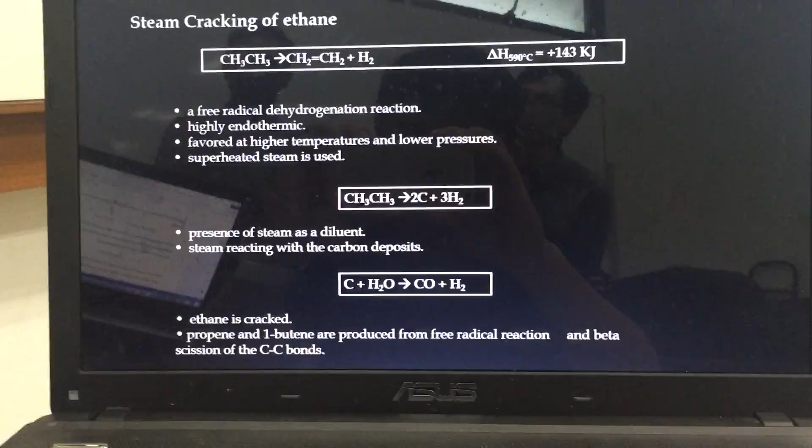First, cracking ethane can be visualized as a free radical dehydrogenation reaction where hydrogen is a co-product. The reaction is highly endothermic, so it is favored at higher temperature and lower pressures.

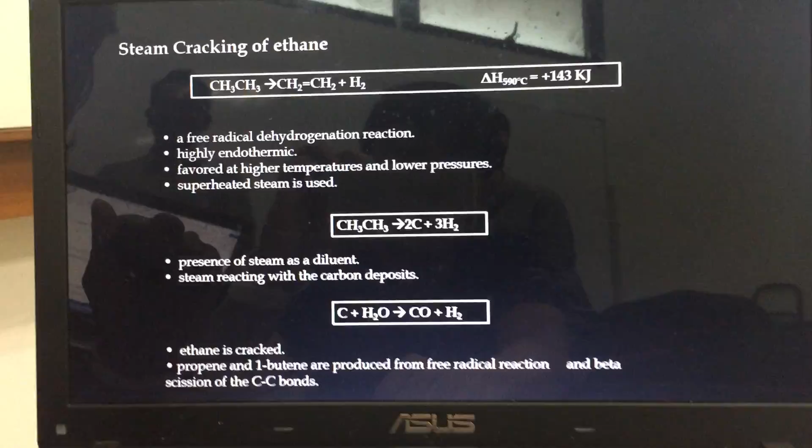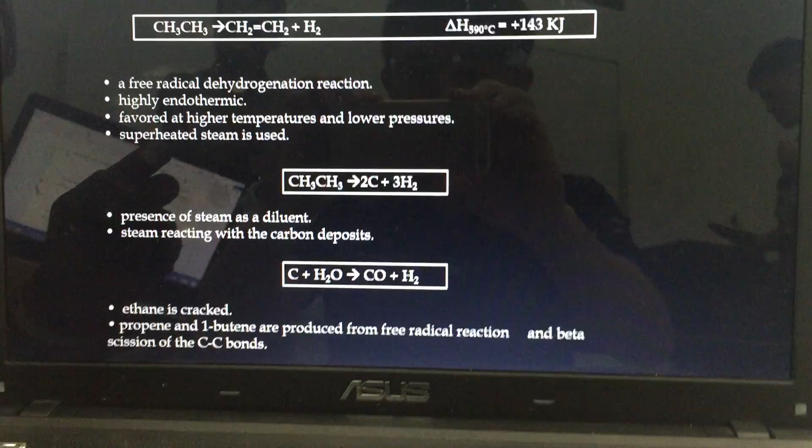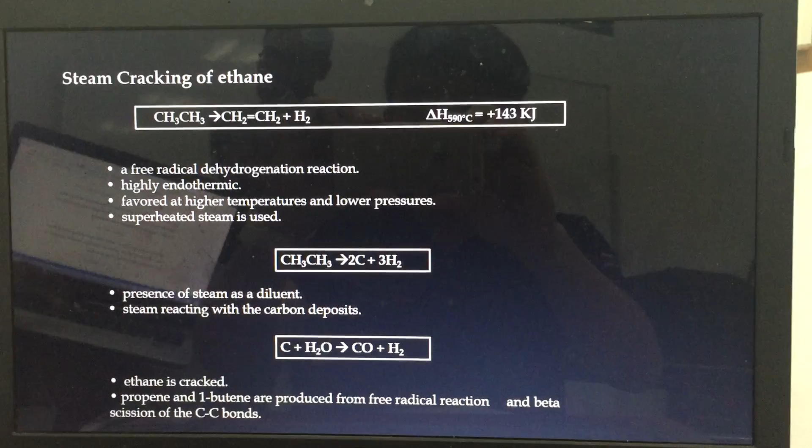Superheated steam is used to reduce the partial pressure of ethane and reduce carbon deposits formed by the pyrolysis of hydrocarbon at high temperatures. Additionally, the presence of steam as a diluent reduces the hydrocarbon's chances of being in contact with the reactor tube wall. Deposits reduce heat transfer through the reactor tubes, but steam reduces this effect by reacting with the carbon deposits.

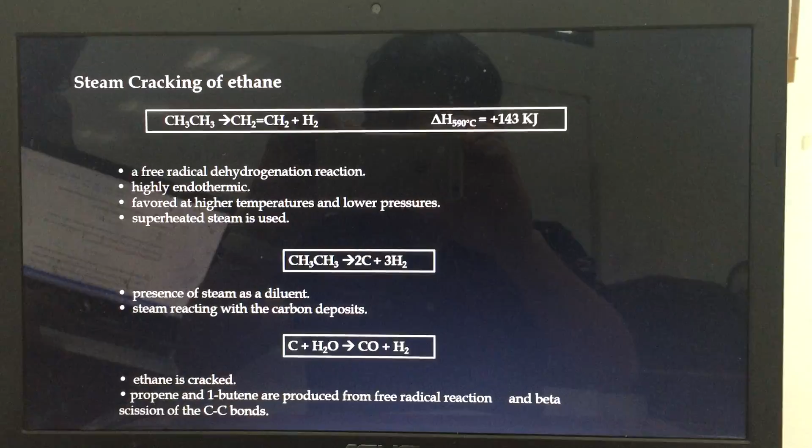Many side reactions occur when ethane is cracked, where propene and 1-butene are produced from free radical reaction and beta scission of the carbon-carbon bonds.

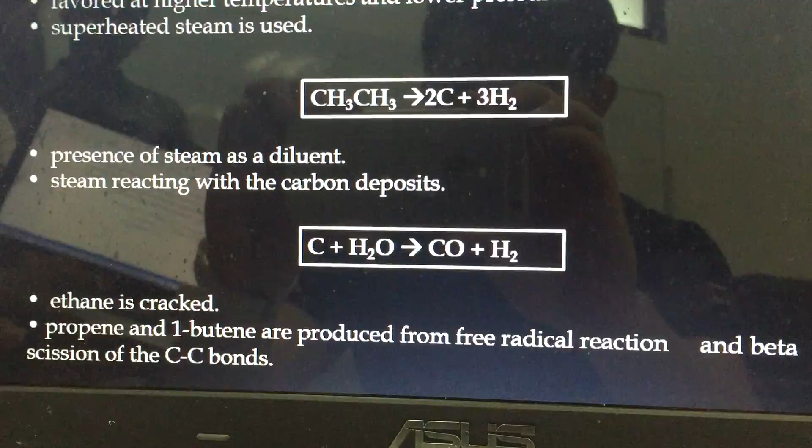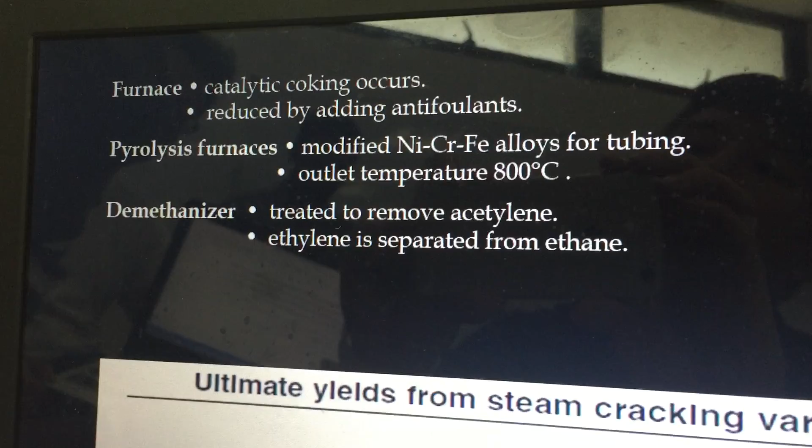The newly formed free radical may be terminated by abstraction of a hydrogen atom, or it may continue cracking to give ethylene and a free radical. The produced free radicals further crack to yield more olefins.

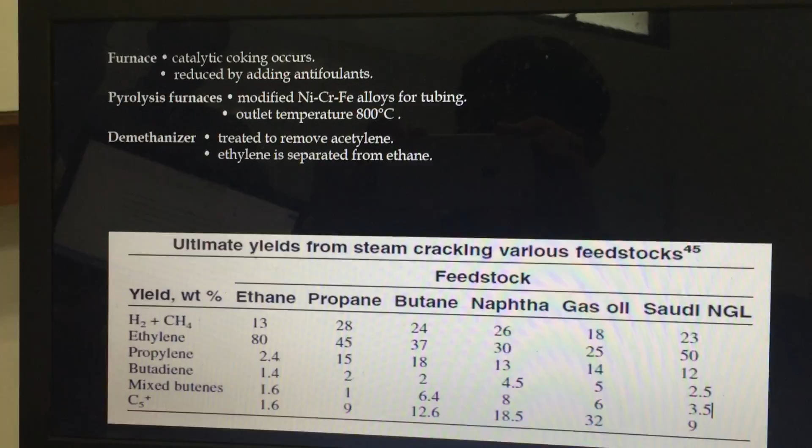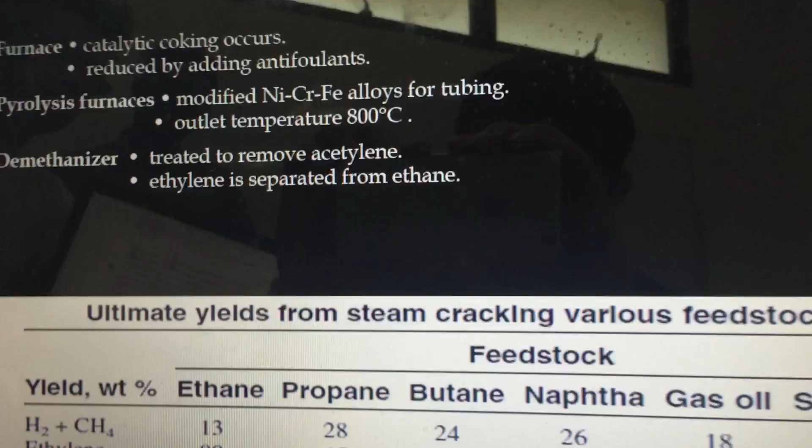In the furnace and in the transfer line exchanger, catalytic coking occurs on clean metal surfaces where nickel and other transition metals used in radiant tube alloys catalyze dehydrogenation and coke are formed.

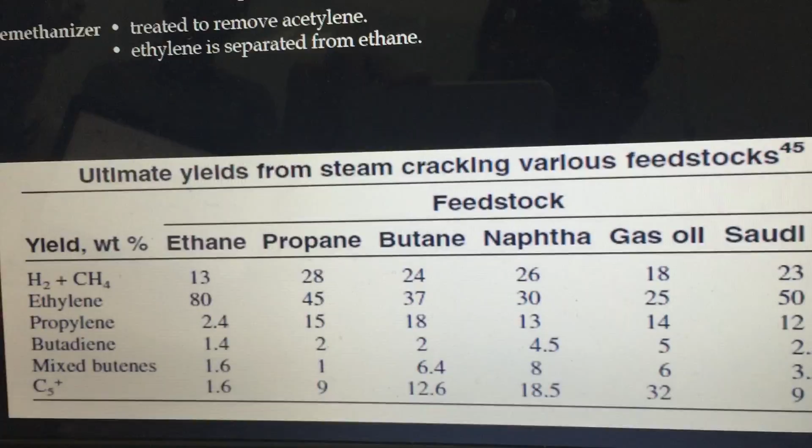The radiant tubes gradually become coated with an internal layer of coke, thus raising the tube metal temperature and increasing pressure drop through the radiant coils. Coke formation reduces product yields, increases energy consumption and shortens coil service life.

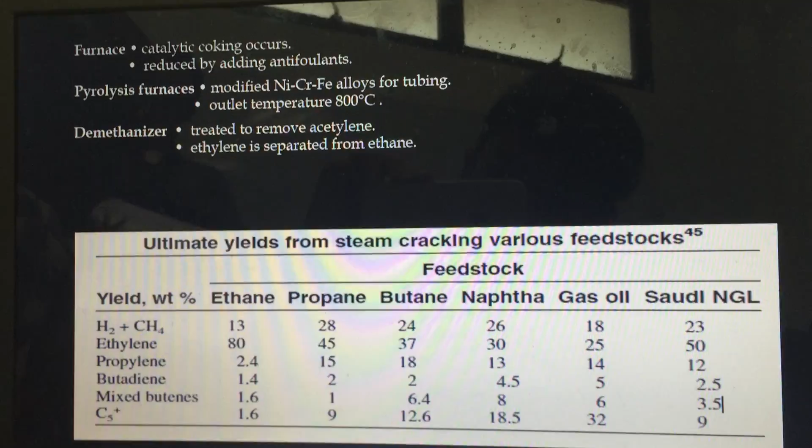Coking is related to feedstock temperature and steam dilution. When coke reaches an allowable limit as indicated by a high pressure drop, it should be removed. Coke should be reduced by adding antifoulants which passivate the catalytic coking mechanism.

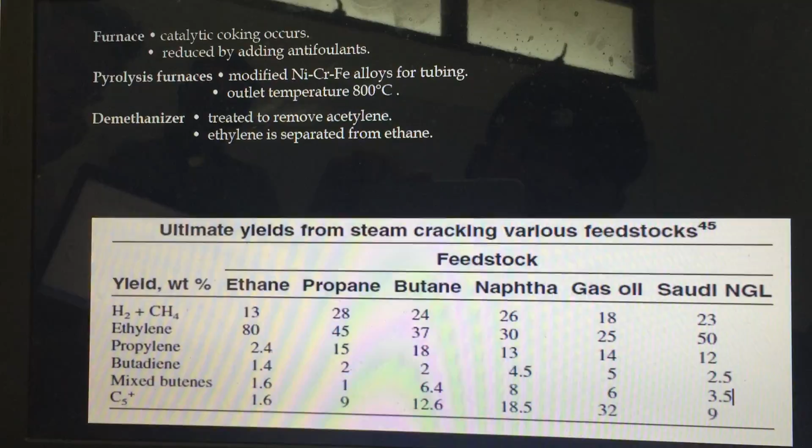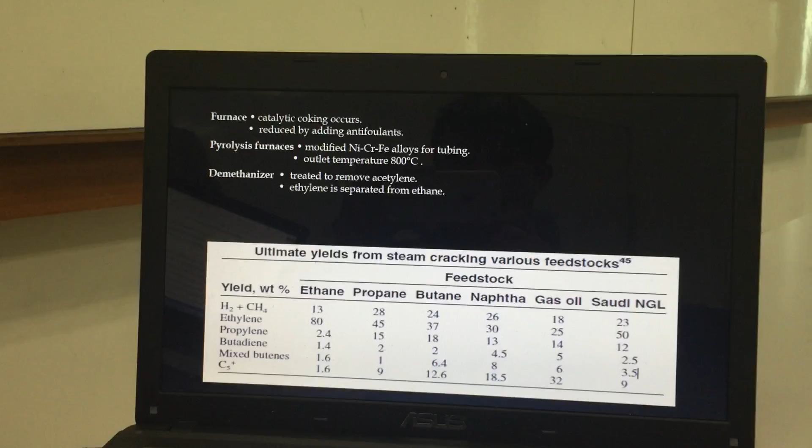Significant improvements have been made in the design and operation of high severity pyrolysis furnaces. Usage of modified nickel chromium ferrum alloys for tubing has enabled raising the temperature, shortening residence time, lowering pressure drop in cracking coils and increasing their long-term strength.

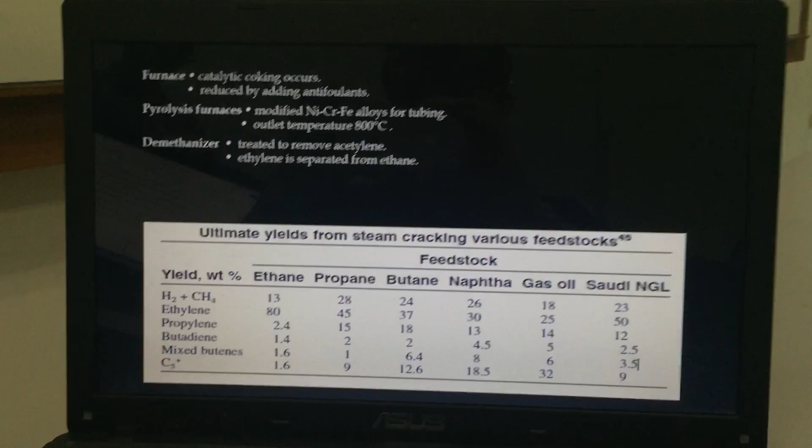A typical ethane cracker has several identical pyrolysis furnaces in which fresh ethane feed and recycled ethane are cracked with steam as a diluent. The outlet temperature is usually in the 800 centigrade range.

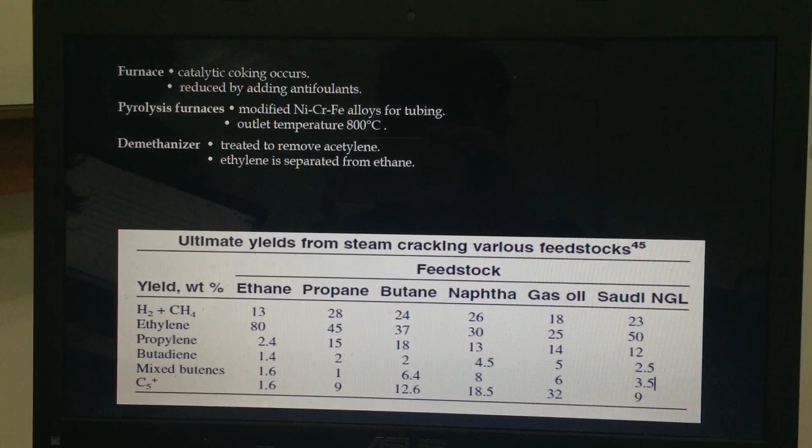The furnace effluent is quenched in a heat exchanger and further cooled by direct contact in a water quench tower where steam is condensed and recycled to the pyrolysis furnace.

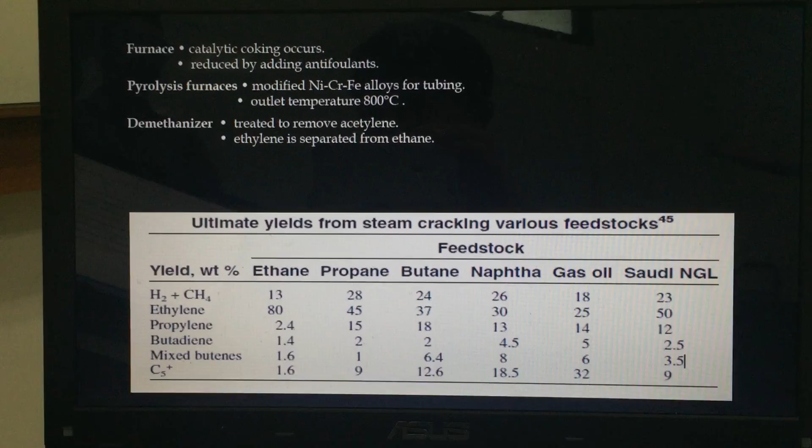After the cracked gas is treated to remove acid gases, hydrogen and methane are separated from the pyrolysis product in the demethanizer. The effluent is then treated to remove acetylene, and ethylene is separated from ethane and heavier components in the ethylene fractionator.

The bottom fraction is separated in the deethanizer into ethane and propylene, butylene and higher fraction. Ethane is then recycled to the pyrolysis furnace.